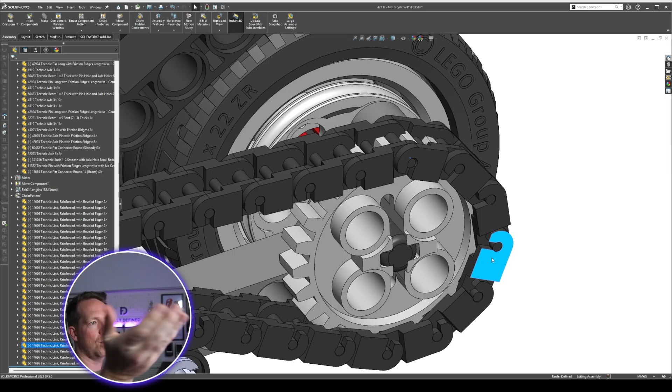Welcome back. Today we're going to assemble the full LEGO Technic motorcycle in SolidWorks, taking every part we've modeled so far and bringing them together in a complete working assembly. If you've ever struggled with assemblies, or you're not quite sure how all the mate types fit together, this is the perfect project to practice on. This video is recorded in real time, so you'll see the actual workflow: how I position parts, how I choose the right mates, how I troubleshoot alignment issues, and how I keep the feature tree clean as the build gets more complex.

I'll show you the exact steps and process I use when building any SolidWorks assembly, from the first mate all the way to the final checks. And if you want to follow along in your own time, you can download the model files for this entire project and build the motorcycle for yourself. It's a great way to practice assemblies, understand Technic geometry, and get comfortable with SolidWorks at your own pace.

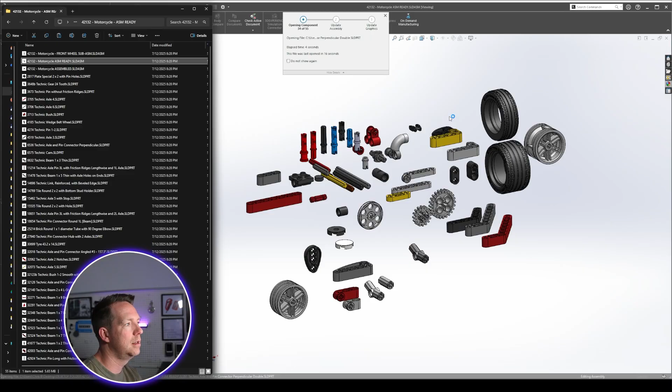So let's start with the assembly ready file. Assembly ready just means when you open up that file, all the parts are there, at least one of every part. There's no mates in this assembly, and there's no other reference geometry. So all I've done is really just drop every part in so that you've got it all here, and you don't need to go looking for things as you get started.

Now, before we start the assembly, there's one other thing that you'll need, and that is the assembly instructions. I've also linked them here in the LEGO library. You can see the motorcycle instructions down the bottom here. Click on that and they'll link you to a PDF file. You can view that in the browser, in Adobe PDF, in Adobe Acrobat PDF Reader—any type of PDF viewer will be fine.

Now, before we actually start mating anything, it's worthwhile taking a minute to think about or plan out your assembly, the same thing you would do with any product design that you're developing. You want to consider who your audience is, who you're communicating to, what you're putting together the model for in the first place. If it's just play or just training practice, maybe it doesn't matter so much.

But I'm always thinking about professional practice. And in this case, if I'm trying to replicate products such as this, and I look at the image, well, there's a few things that come to mind when I can see the product here and I already know the parts that are going into it.

And this is typical of how you might run a product design project anyway. You'll have done your sketches, you'll have worked out what it's going to look like. You start building it in CAD, and then you might build the parts individually or in a master part file, split them out. When you start building the assembly, you're going to have a specific orientation or position relative to the origin where you're going to want to put your parts.

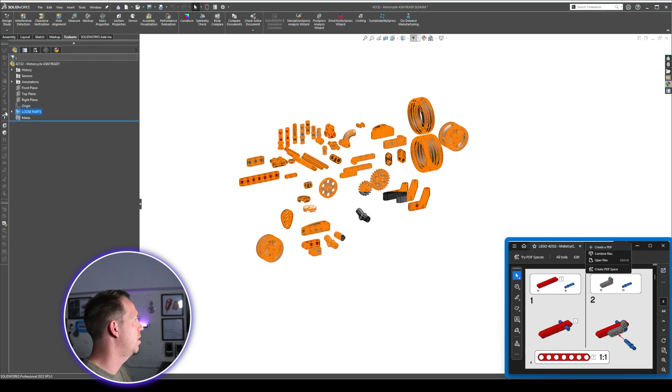All right, first thing I'm going to do—I have put everything in a folder. I'm just going to show the right plane. Let's just make sure planes are visible. Okay, the other thing I want to work out is, where is my front? The last thing I'd want to do is assemble it all facing backwards. This can be important for drawings, rendering, exploded views, or animations that you do later. Just helps to spend that little bit extra time to get the alignment right as you're starting off.

I'm going to show the front plane as well. I'm just going to go to my front view. So I can see this is the front view, and this is the isometric view.

So whatever is my first part, which is this, it's a part with 7 holes and it is red. I think it is this one here. I'm just going to make sure I'm orientating it so it's facing towards the front, and so the mid plane of this is going through the right plane.

First up, I'm just going to use the move component tool, just a free drag. I'm going to rotate this around just to get it roughly in line, and then I'm going to mate it. Sometimes that makes it a little bit easier to get your mates done straight away, because if something is already perpendicular to a plane, SolidWorks might suggest other mates like a perpendicular or parallel mate rather than the one you actually want, which in this case is going to be coincident, depending on how the part is built.

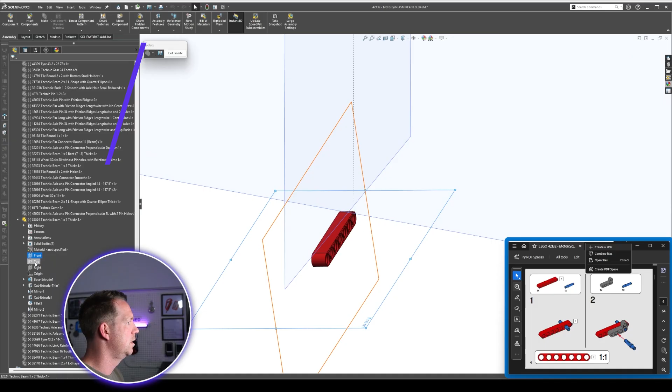I'm going to use a lot of shortcuts throughout this video. The one I just used there is a hotkey—I have the I key on my keyboard set to isolate, so anything I have selected, when I press I, it's going to isolate that. In this case it's isolating a part. I can see this is the part that I want, and I can see it's actually the top plane that goes through the middle of that part.

I'm going to hold Control, select the right plane, and select coincident on the little shortcut bar that pops up, so it's going to line up those two. I'm then going to, as we talked about earlier, hide the front plane, and show the top plane for a second. There's the top plane.

We know that there's going to be a gap here. If we can just use this right plane and this front plane and mate those two, and then for the height, we can either put a fixed constraint on this part—so we could right click it and go fix—or we can put that front plane and the top plane together with a rough dimension in there. Let's say it's going to be 20 millimeters.

Now we'll see this part is fully defined. Everything else is still underdefined. When we're isolating and looking at this part, we get the fully defined information down here. If I isolate, I expect it's very strange—actually it's not, it's telling me fully defined, but I know for a fact that there's a lot of things that can move around. So there we go. Now it's saying underdefined, that's here. Everything else, we're going to start to move around it.

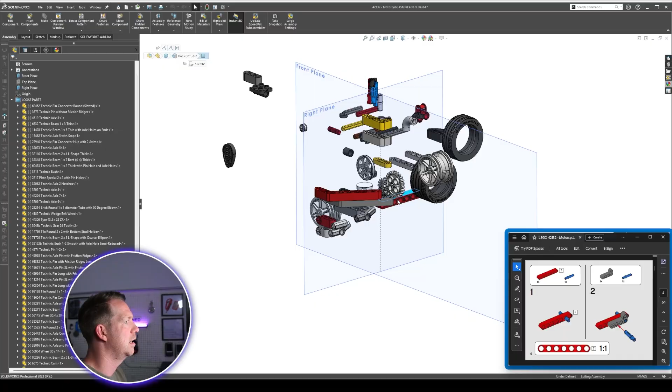So I'm going to start a new folder. What I'm going to do is drag this one out of this folder—to do that, I click and drag, drag it up here, hold the Shift key, and it's going to move it underneath this folder, which means it actually takes it out. I'm going to put this in a new folder called Assembled Parts.

I'm doing this so that we can very quickly hide and show parts that have either been assembled or have not been assembled, just to make things easier for managing later. For instance, I can grab everything in the loose parts options here, so I'm going to grab everything in this folder, click move component, and just drag them off to the side so that they're clear of my assembled area.

Press the tick. The other thing I'm going to do, now that we've started assembling this file, is a save as. Of course, you can save it with the file that you've just done—I'm going to change the name of this one to work in progress, WIP. We know that this one then is our active file, and we've still got the assembled version there for reference if we need it.

All right, first part's done. I'm going to hide the front plane. I will keep the right plane there because we will use that a bit more later as we start doing mirrored components. Okay, next part is a long blue one.

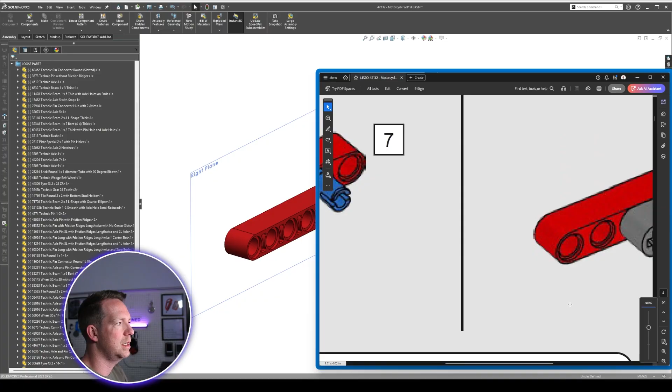Now, I don't know the official names of these parts, but we might learn them as we go. So, some quick mates or some quick points on these—it is difficult to see, but if you zoom in on this detail, you can see it's got a little lip on this side, right?

What that is in reference to is this feature here, which is going to be on this side of the part. So there's a couple of ways you can do your mates. The first one, I was using some shortcuts. Another way is to select two holes like this, or two circular areas, and then click mate.

It's going to bring up the shortcut bar, and it's selected concentric for us. We're going to press OK on that. We're not going to lock rotation because we're going to be very specific and particular about the rotation of our parts, and we're going to make them so that they're all lined up neatly. We want it to look good in the drawings or renders we do later. I'll press OK on that one.

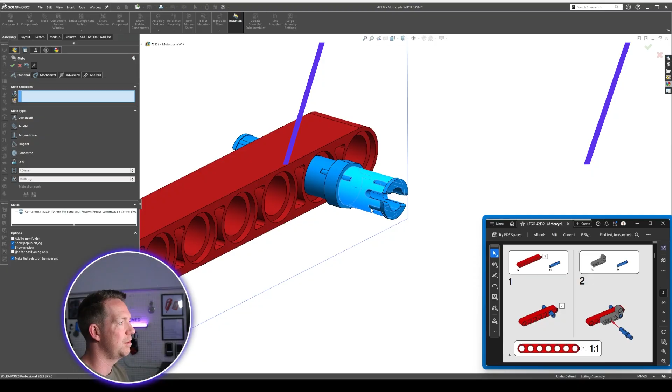Now, to move a part when you're mating it, the trick is to click and hold your mouse button down when you're moving. If you click and let go, it's going to select. But if I click and drag, then I can move or rotate the part around. Sometimes it's easy to do that so you can see these views to then add the next mate.

So we did those two, and that's got the position done now. We need to stop the rotation for this one, so we're just going to select a flat face and another flat face, and SolidWorks is going to make it parallel. You can see on the cursor there's a button with a check mark on the right mouse button, which means if I right mouse button press, it's going to accept that mate. Now I can keep this mate window open—by default it's pinned to stay visible—and just keep adding mates.

If I can find the next part, which is this gray L shape—is it this one here? Three holes and then one across. I'll bring that one down, bring it over here, and click on this face and this face, right click OK.

Accept the mate. Now, if I rotate this down, let's select this face and then the inside face here, press OK—that's adding a coincident mate. You can see over on the left the mates that have been added one by one.

If we need to, for any reason, go back and change those—let's say this one—I can right click and delete, or I can click here and change the type of mate it is. So if I wanted to change it to a distance mate, for instance, this is one that happens regularly, I can just put in the number here and it's going to add the distance mate instead of the coincident mate. We'll change that back to coincident, press the tick, and then press these two surfaces to line them up.

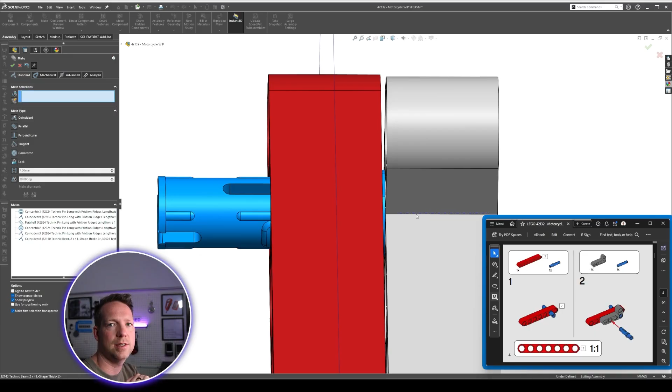If you come upon errors, which we may very well do in this video, you need to work through troubleshooting them. And if you need to change the dimensions of the parts to get them to fit, please be my guest. Let's continue. We're starting slow with these mates, but as we go through some of the basic ones, and you've seen all the basic types, we're going to jump into a bit of time lapse. So bear with me until we get to that point.

Next little trick here, we're doing another one of those blue parts. We've already got one right here. We want to duplicate it.

I'm not sure if I can do this with the mate tool open, but to duplicate, I'm going to press Control on the keyboard, then click and drag. No, that does not work. So I'm going to close the mate tool. Now press Control, click and drag, and you can see it makes a duplicate of the part.

Another way I could do that is to select the part here in the feature tree, press Control C and Control V. If I do that, it's going to drop a part exactly on top of the one that's already there. That one can be a bit more difficult to click and drag. That's why I often don't use Control C, Control V. If I'm duplicating, I'll normally Control, click, and drag to the side.

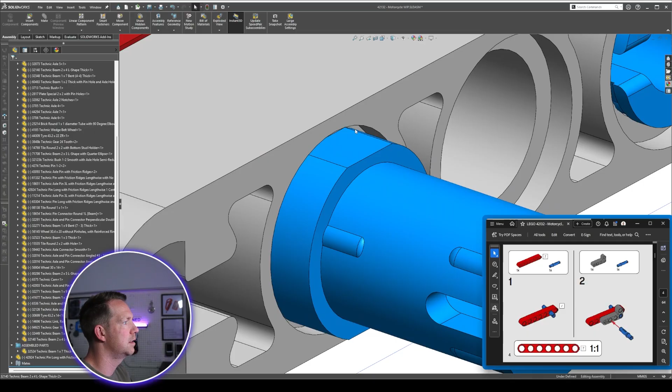All right, so let's grab this one, and I'm going to select these faces, concentric mate, select this face here. Now I lost my mate tool. Select these two faces and coincident, and it's just been added automatically. If I want to keep the mate tool open, I need to actually select the mate tool, and then it'll stay pinned and I can keep going one after the other.

All right, step 1 and 2 done. Let's keep going. Step 3, 2 long red pieces. Let's see if we've got them. There's one and there is the other. I'll bring these across over here.

Now it's showing us how they're assembled. So this one's on this side, this one's on this side. It looks like this and this are lined up. Now you can see in the preview here, it has lined those two up but at the wrong orientation. To flip an orientation, I'm going to click this arrow, flip, make alignment. That's going to rotate around.

So that's good. I want to come onto this side, click this one, drag it out. Just want to get, it should actually be on this side. Yep, so it's this face and this face that are going to be coincident. And then here, if I want to line up this one, get it all lined up neatly, I'm going to select those two faces to make those parallel. And then I'll bring this part over. I'm going to make this and this concentric.

Flip alignment, press the tick, drag it back. I can see that in the picture, the slot is on the side, so I'm just going to rotate it around so it's like this. And then we're going to grab this face and I'm going to guess this face.

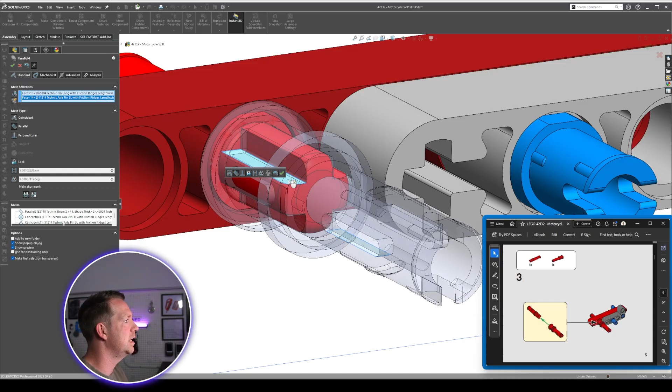This is a parallel mate. It's just lining up those two faces to make sure that they're aligned.

Okay, another step done. Now, at this point, you can see that we're starting to put a few of the parts from our loose parts folder over here. And we have this one as well, so we're just going to drop them into assembled parts.

And what we can do is I can just click on this folder and I can click on this part. I can see where the part is, it's here. I'm just going to drag it to the assembled parts folder.

Or another way you could do that is you can grab everything here, drag a box over it, right click, hide, and then anything in the loose parts folder that is showing, for instance, these three parts, I know that those are these three here. I can click and drag and put them in the assembled parts folder at the bottom. Then I can show this one again so that I know that I'm keeping picking my parts from this area over here.

All right, we have another long part. So I'm going to duplicate that red one. And now actually, before I skip ahead, I've got the model in front of me, and if I have a look on the bottom, I can see that it's actually the gray one that's in the middle, not the red one to the side.

So some of my first guesses, like putting that red one in the middle, were actually wrong. We're going to have to roll that back and change it. It's okay, we're here to make changes and learn as we go. Also, I don't need to add a duplicate of the second red one.

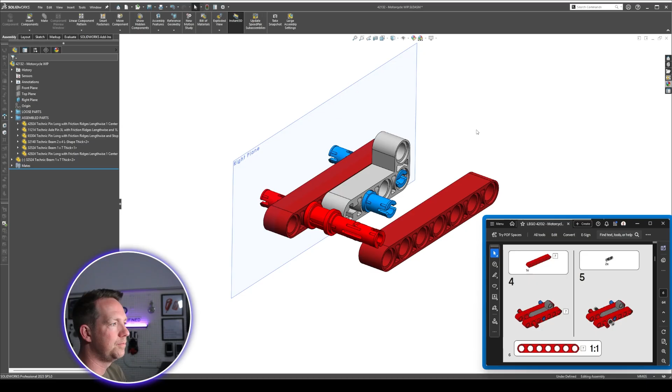This is where I can start to use my mirror components feature. Let me show you how we're going to make the change. First up, I'm going to delete this, then this part here. I click on this Technic beam, and up top I can see these breadcrumbs, which are all the mates that have been added to this part. Here's the very first one we did, which was the right plane.

That's one I can select and press delete on the keyboard, which means I can drag this to the side. Now I click this gray part and see what plane goes through the middle of it - it's the top plane. Hold control on the right plane, add a mate. Now that is the center of my model, not the red one as it was originally.

To mirror or start our mirror feature, I'm going to go to the Assembly tab, Linear Component Pattern, and under that drop down select Mirror Components. I'll select Mirror Plane - that's going to be our right plane. For components to mirror, the only one I can see mirrored so far is this red part.

I don't need to go through all the subsequent options - we're not changing any orientation, just making a copy on the other side. I'll press OK, and that's going to mirror that part for us. We can see it here in the mirror component feature, and if we press the drop down, we can see we have one part there.

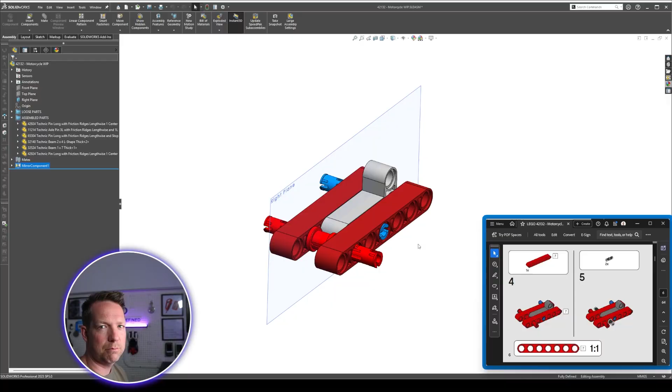Now, I'm not sure if you saw it earlier when I showed the preview of the finished assembly, but there is only one mirror component feature in the whole assembly, excluding the sub-assembly of the front wheels. The process I used throughout this Lego build is that every time I came across an instruction step that made a mirrored component, I would just add that part to the existing mirror component feature. There are some parts or types of geometry that don't like to be mirrored, and they want to change orientation or not make a proper right or left-hand version of themselves like we'd expect.

There are some more advanced options to go through in that mirror component feature that we'll look at if that comes up, but otherwise it's a very simple way of doubling up your assembly if the whole thing is symmetric, saving you a lot of time. We'll use that regularly as we go through, particularly through the time lapse as well.

Make sure to save regularly, Control S, and let's get on to the next step, which is adding these little black parts in. I've got one of them over here - I'm going to bring that down. We're going to use a few of these, so I'll actually leave the original one here, make a copy, and use the copy to mate. Let me grab this one, get these two faces, mate those, drag it out, and select these faces for coincident.

Remember, if I want to keep the mate tool open, I need to click the mate tool. Let's click these two to make this part aligned.

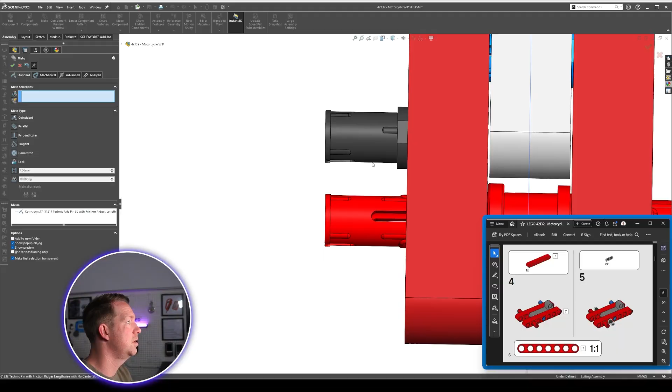Now I've just noticed something here - I'm not sure if it's going to be an issue or not. I'm going to hit M for measure, that's another hotkey. From this face to this face, you can see the dimension is 8 millimeters. From this face to this face, we can see it's 7.9. So somewhere along the way, these parts have been created separately - one measured differently than the other. One of them might have some interference in the model later. It's not a big deal for us in this project, but that's one of the things you can check in assemblies as you go through, part of the validation process you go through as you're creating your product.

Now, as we just did previously, we're going to add this part to our mirror feature. So I'm going to edit feature on the mirror component.

I'm going to select the new part, press right mouse button for OK. Now we can see it's been mirrored across.

Very quick process. All right, let's fly through this next step very quickly, because I want to get up to our first key lesson of this assembly, which is going to be using the cam mates. That is coming up in a couple of steps.

So this one here, I'm going to do concentric. Now I want to keep adding mates because I want to get on a bit of a roll. Let's see if we can't do that. Put that one there, again, edit the mirror.

And here we have what looks like a new sub-assembly. Actually, it kind of is. We can see in this image here, we're making this sort of group of components that we're then going to mate to the existing geometry, the existing parts that we've already put together. It's not necessary to make this as its own sub-assembly file.

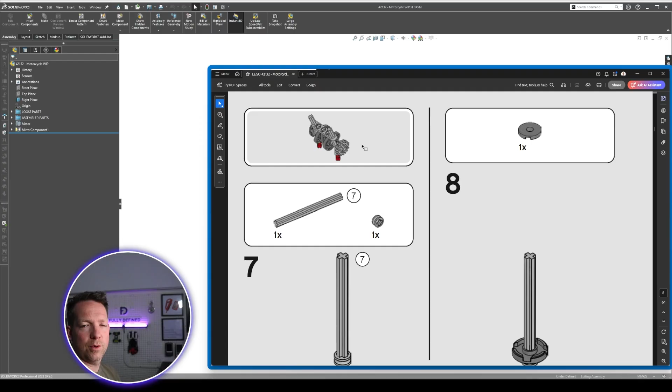You could do it if you want to practice sub-assemblies. I'm not going to do that today, but feel free to diverge from my instructions and use the LEGO instructions that are there. What I'm doing is simply a demonstration of some of the tools that you can use.

All right, so I'm going to grab that axle, which is 7 long. That one's over here, I believe. Axle 7, yep. Bring that over and grab one of these parts, I think - a Technic bush. Bring that over as well.

Now, you've got to remember that the drawings for LEGO are done for building the physical parts. Doesn't mean we need to assemble in this exact same orientation. So even though that one's going straight up, I can actually leave it going crossways, and I'll do that.

But what I will do is just temporarily right click on this one and go fix, so this part won't move and I can mate the other parts to it.

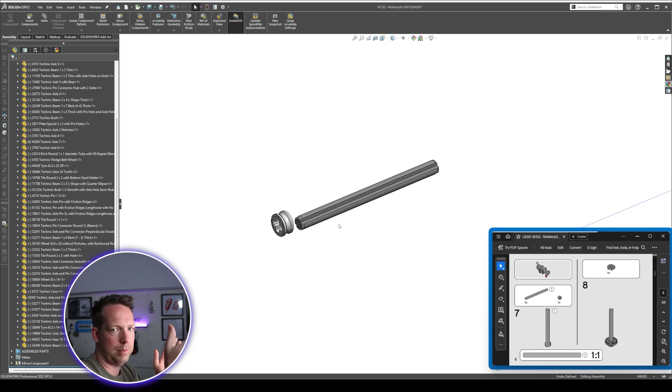Now, one thing you could do here is actually bring all the parts together that you need, bring them over so they're right in the space that you're working with, and then open the mate tool and just go bang, bang, bang, one after the other without having to go and grab each part each time. This is a more complicated assembly with a lot of parts, but if I was doing my own project with only like 7 or 8 parts, I would just have them all together in one, so it's very quick to get everything done that I need.

So if I just go through the next couple of pages, I can see that there's a few other parts here that I'm going to use. So I'm just going to bring them over so I get all of them - this one, another cam, another little nut, and then the gear, which looks to be the small one here, and then this 4-piece fin part.

All right, so that's the next couple of steps. So I've got them all close by. Now I can go through and add those mates very quickly. So let's go mate - we might very quickly here, we'll jump into time lapse.

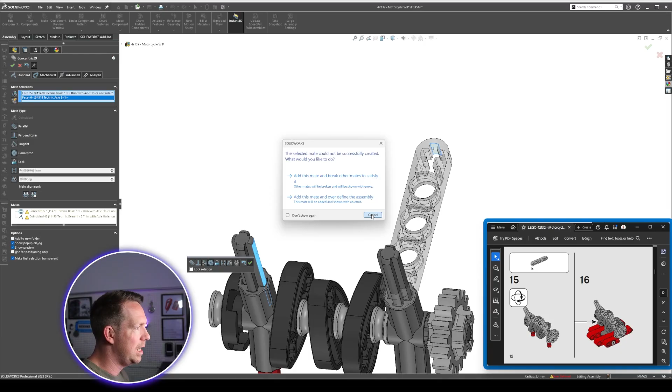What we're going to do is press cancel - that's going to delete that mate we tried to add - and press OK. I'm just going to rotate this one around and we can just see roughly how far apart it is. Now, we know that our hole center to center in LEGO is basically 8 millimeters.

If there's 4 holes, there's 32 millimeters. If I measure this one to this one, center to center, you can see it's 31.65. So somewhere in those mates, all the mates that have happened below it, there needs to be a little bit of extra gap. We can see there's a bit of extra gap here that really hasn't been taken into account yet.

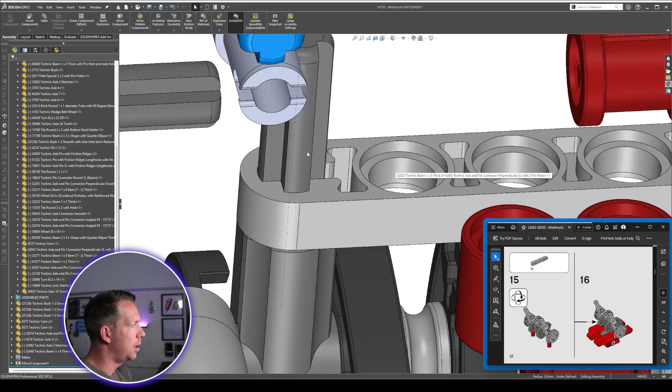So how are we going to fix it? There's a few ways. First, I'm going to look at this part here, see its mate, the coincident one, and delete it. That's going to let this part slide up and down. I still need to add some mates back, but I'm not going to let that one control the distance. Instead, I'll grab the mate tool, grab this outer circle, semicircle, and then this face, and now that concentric mate can occur. I press the tick, press OK. Now that part's fully mated. This one can't move, it can rotate around, but its position is set.

If I want to get the rest of them perfect, I could have a look at what this distance is. I can see it is 0.35. I could go through the rest of these and offset each of them 0.05 of a millimeter. Maybe it's down here, maybe it's somewhere along the lines, maybe it's just this mate. Maybe this one and this one here - press isolate - these two should be perfectly centered, shouldn't they? So maybe that's the mate we should add to work out the rightful position, the correct position.

For now, let's just leave it. It's 0.3 of a millimeter. It's tiny, but if you wanted to later, you could go back and edit those other mates so that they're all perfectly evenly spaced. We're going to move on. Feel free to do that if you feel like it.

So now back to our main assembly, our setup. Let's just get back to the key orientation, which is isometric, here. So this is the view, and now we're ready to assemble this part.

Now I've had to come back to this one and find the one that was originally fixed, and it was this one going through the middle. So I'm going to right click and press float, then bring this to the side, and it's the red part that's going to fit into these holes here. So I'm going to grab the mate tool, grab these rounded edges on the axles, grab a rounded face here, mate and flip alignment. Yep, that's okay. And then I'm going to do the same on this one over here.

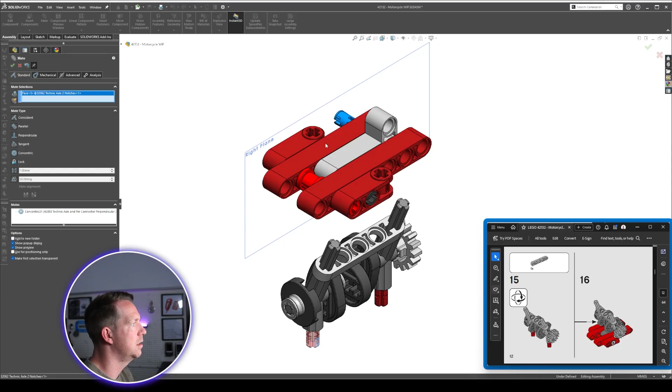So again, we're doing a similar thing with our mates. We might find that it doesn't fit, but I think because we've already done that spacing here to get it perfectly right, and I probably already troubleshooted the rest to get them perfectly right, that one worked. Okay, let's add another mate here, bring that component up, and I think all those components there are now fully defined, apart from this part that we can rotate. Cool, this is some really good progress.

I'm just going to clean up my folders, grab all these parts, move them into the assembled parts folder. Anything else, loose parts? Well, my trick was, remember, hide everything, see what's left in the folder that's visible, click and drag those. You can see there's quite a few parts now, and I'm going to move them all to my assembled parts folder. Cool. So, let's keep going.

So here we're going to learn about cam mates. First up though, we have to get these cams - sorry, I'm not an automotive guy - we're going to get these parts into the assembly. I do know that they do not fit perfectly, but it should be enough for us. You'll see what I mean in a second.

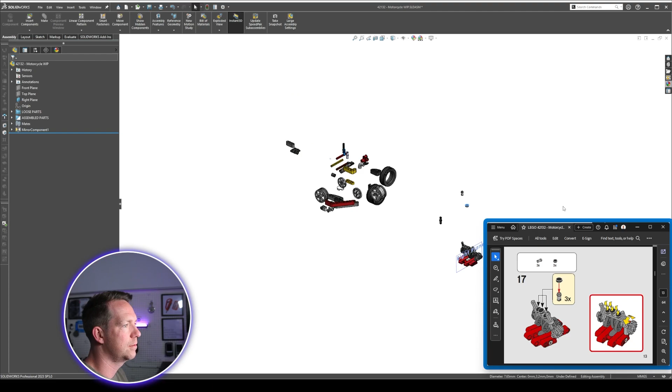So I'm going to grab this down here, and we need to do 3 of these, but we're not going to do a linear pattern because, as you can kind of see from the preview image, they're actually going to be moving heights at different points relative to the parts that are beneath them. And that is a fun little thing to have a go at.

All right, so we've got one there. I'm going to bring that one over here, do a concentric mate, and we're going to get these to line up. Okay, and I'm just going to leave it here, and I'm going to do the other ones. Again, make sure you're saving regularly.

I'm just going to hold Control, click and drag, and then open my mate tool and repeat those similar mates we just did. All right, so we've got those three lined up, and we can see there's a little bit of clearance between them.

Now, how this part functions in the real model right here is that when these parts are rotated with the gears, with the chain, these will ride up and down. They'll pump up and down following this outer face. In SolidWorks, that is called a cam mate. It's not one I've done a lot of before, but it's a fairly simple mate to do.

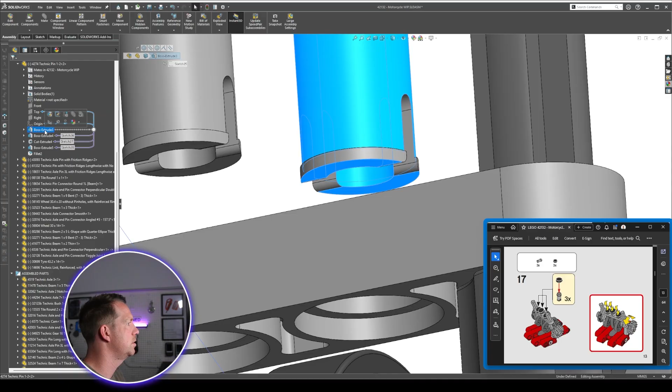The one thing that will speed you up here is that instead of selecting this face, I think we get a better result if we use a sketch element that's right in the middle of that part or feature, that geometry. So I'm going to click on this sketch here, and go show sketch. And you can see what that does in SolidWorks. I can see the sketch that's creating that feature all the way back through here into my assembly.

Now, if you have pressed show sketch and you still can't see anything, just check your hide all types icon. If you are hiding all types, that will hide planes, sketches, other reference geometry, even if it is showing in the part. Sometimes you need to uncheck that or make sure sketches here are visible so that you can see the sketch in your assembly.

All right, so I can see that sketch. And what's important there is I'm going to use this little point, the center point of that circle.

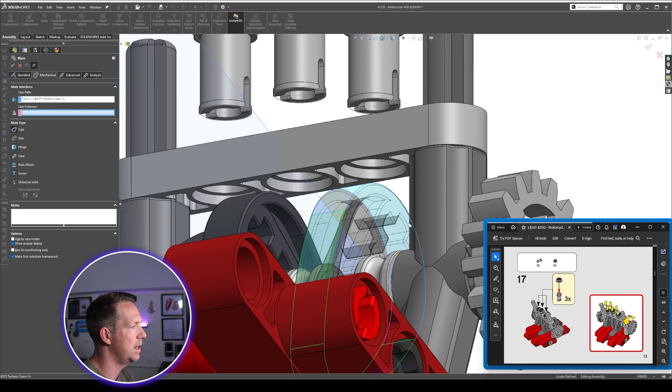I'm going to open my mate tool, click on mechanical mates, click on cam, and I need to select a cam path and a cam follower. The cam path is this face. You can see when I select the face, SolidWorks knows tangency along that direction, and it can work out where that cam path is going to be. So I selected the blue, it's added in these other green faces. Cam follower is going to be this sketch point here, and that's it.

I'm going to press right mouse button OK, and I'm going to go through and do the other ones at the same time. So cam, select this face, select this point, and then the last one over here, cam, sorry, I've got to select the mate type first, and point, and OK, and OK.

Now, this is not perfect. You can actually see a bit of an error here, a bit of interference. In fact, on both of those. But I'm just going to rotate this around, and we'll have a look at what's going on.

All right, so we're just going to change something here. I'm going to use these two and isolate. The problem we could see is that by using that center point as the cam follower, often the parts are intersecting, interfering. It's not a true representation of what's happening.

So what I'm going to do is select this part and select that cam mate and delete it. I'm going to add a new cam mate, but this time select the face rather than the point that's right in the middle. Now what that means is it's going to be the tangency of the face, the entire face, not just a point. But you can see it's already moved to a position of clearance.

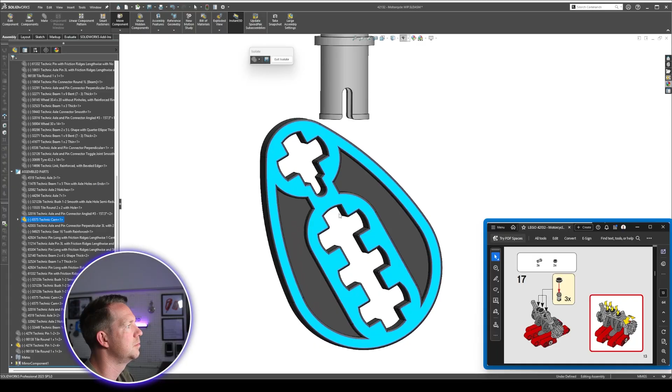When I rotate this part now, it's going to move up in a much more realistic fashion to the outside. Yeah, there's still a bit of jumping, as you can see here, but it is much closer without the interference when you're comparing that to what we saw before.

So I'm going to do the same to this one in the middle as well. Now, you don't actually have to delete the mate. You can just change the cam follower from a point to an outside edge sketch. That is another option, or the face.

Let me try that one, the point on the outside edge. I think I'm still going to get the same issue. Yeah, so I'm getting this interference. So I'll change that again back to the face.

Okay, might get a warning. I'm getting an error now, but we'll see if we can remove that. Doesn't like this one, I will delete it. I'm going to try again. Now, this time it hasn't given me an error, even though I've done exactly the same selections. Exit isolate.

We can see a preview now of how that looks. Now, it's not perfect, but it's probably an improvement.

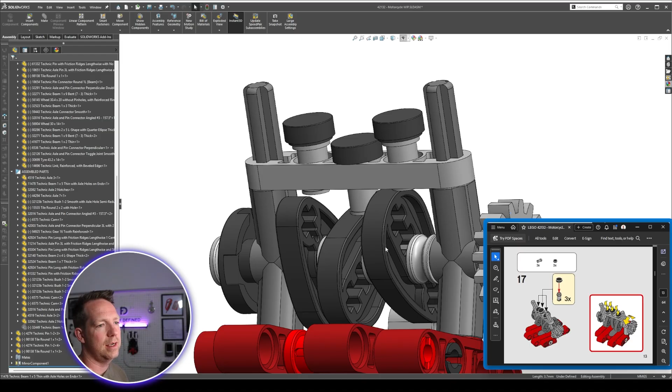Now, the thing that I would like to see, and which is difficult in this assembly, is there should actually be a combination mate. I want to do a distance mate or a range distance mate. What that means is an advanced mate where I have a range of distance.

So I could set it to be between 0 and 5 millimeters, for instance, because what I don't want to happen is these parts, the heads here, dipping below. You see here, because it's following this tangency at the bottom, it's coming all the way down.

Whereas in the real part, what's happening is this part then just floats and stays on top. So this one would never come lower than this. This part would continue to rotate, and then this part would come back up again. You don't get them dipping down in interference like you can see in this example.

But that doesn't exist yet in SolidWorks, so we cannot add it at this point. Save that, and let's continue.

The next series of mates are things that we've already come across - a lot of coincident, concentric, some parallel mates to get things lined up. Let's time lapse through those, and I'll come back when we've got something important to look at.

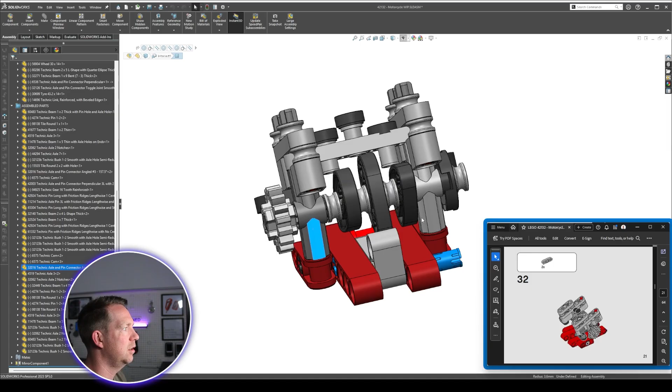The same thing can happen down here. I can see these 2 earlier. I think this assembly has both dark gray and light gray versions of those parts. I'm going to grab this one here and change it to gray, and grab the one that I did not do a mirror for, so I'm going to have to grab this one as well, and just change the color of both of those early on. Right now, just keep going, and now I can continue from here.

All right, the mate I'm about to use here is called a width mate. What the width mate does is let me set the position of this part to match the width with another part. Basically, get it in the center, but you're doing it without selecting 2 center planes. You're doing it by selecting 4 faces on the outside, or 2 faces and a plane.

In this example, I'm going to select 2 faces of 2 different parts, and it's going to align them so that the width on the outside is equal. This is under advanced mates, and you can see a width mate here.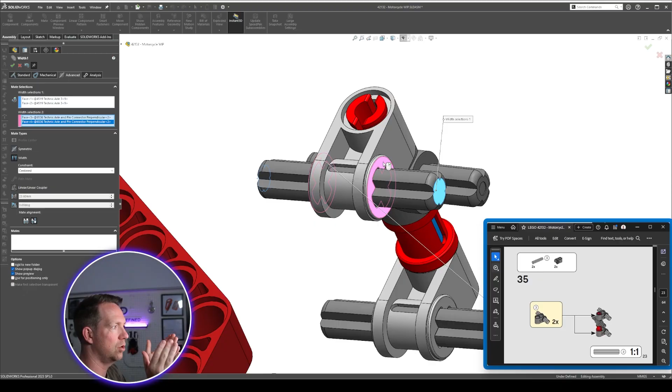Our width selection, I'm going to select this face and this face, so 2 outside faces. And then for the inside, I'm going to select this face and this face. You can see SolidWorks just then moved the parts to make sure it's equal. We're going to right click, and we'll press OK.

And now just to verify that for you, let's select my M key for measure. From here to here is 7.8 millimeters, and from here to here is 7.8 millimeters. The one at the bottom is now also aligned because I mated these two faces together. And that is a width mate.

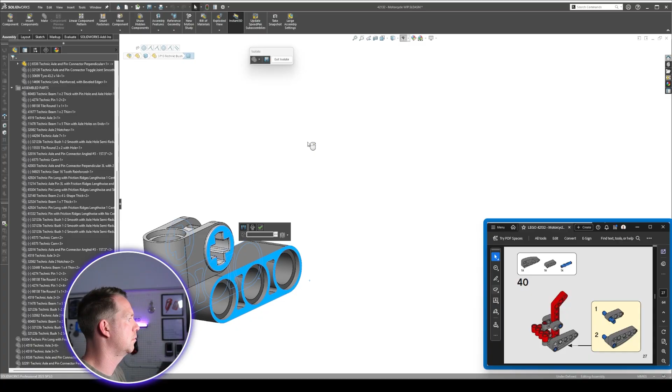All right, so we're at the point here of this little small assembly step where it's asking us to flip it upside down. So I'm just going to go to this series of parts here, just find the one that was fixed. I think it was this one right here.

So I'm going to float that one. Now the whole thing can move. Now we just have to be a bit careful with that. Sometimes I can rotate some things inside out that aren't fully defined yet.

I'm going to grab the move component tool, the rotate component, and just click and drag and try to reposition it based on roughly what we can see in the drawing, just getting it somewhat close. And the next step is to line up, I believe, these holes here.

So I'm going to grab that one, and I'm going to grab, looks like it goes through this, so that's a concentric mate. This one then comes into the center. So this part, I'm going to find this one, I'm going to get the plane that's going right through the middle of that, which is the top plane, and I'm going to mate that with the right plane of our assembly.

Okay, just moves it across ever so slightly. I'm going to rotate the whole thing up. I'm going to grab this part here and put that through the hole as it shows, and get it all lined up with these faces on the inside. Now that one should also be right in the middle.

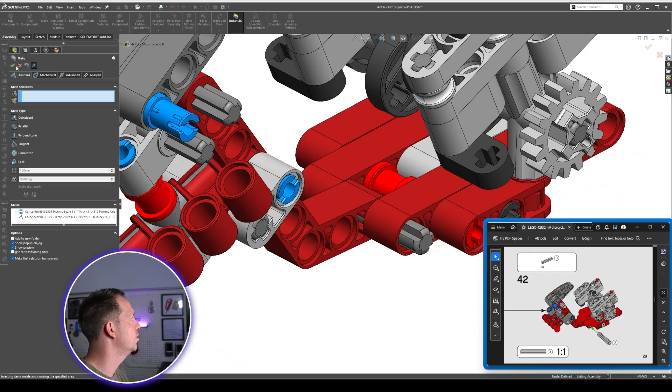We can see something just jumped there. I guess this part's kind of flipped around. This one, Technic Axle 3, if the right plane there is in the middle, which it is, I can also grab that one and the right plane and make that coincident to get that axle right in the middle. Press the tick, and just before we go too much further, let's just clean up my assembly again.

So I'm going to hide all those parts. We can see we're starting to get through them now. Grab all of these, bring them into the assembled parts folder, and grab these ones. Make sure I'm saving regularly as well. So I want to get those. I'm holding control, and that enables me to select multiple files at once, multiple parts. Drag those down, show those, and show those.

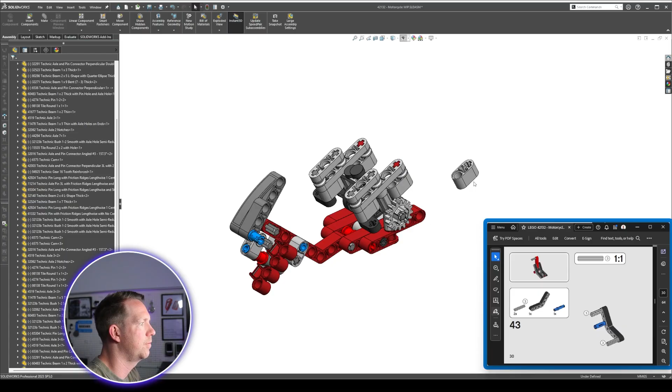So this one here is not in the assembled parts folder. Back there. Okay, looking pretty good. I had two of these. Don't know if I need it. Nope, delete that one. And we don't yet have the other parts to join this all together, so I'll just leave it at this state. Keep going with the assembly.

All right, now here's a point where if some of your dimensions are off in the parts that you're creating and you try and do these mates, you might find issues. So we're about to mirror some component. I'm just going to mirror, I think, this one to the other side. And then we're going to flip.

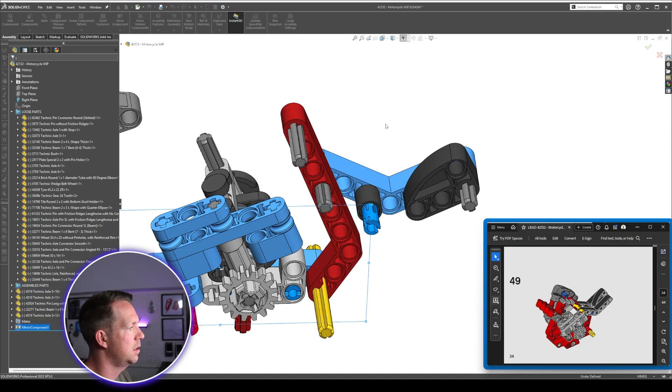Actually, we're going to move this one downwards, and this one is going to move across a bit over this direction to a position where I believe this and this can meet. All right, so what we're going to do is try to get this hole and this hole concentric. Voila. And then we're going to grab this one.

I'm just going to delete this mate, which made it coincident on the interface there, because this one's going to get pushed through like so, so that it's level with the other three. So I can grab this and make them coincident. All right, the body of the motorcycle is starting to come together.

There is still some movement, which is here. In reality, this part can move up and down the seat of the motorcycle. You can see this one at the rear. When it drops down, it sits on this small round element here. So this one and this one, we can actually make tangent, right? And that will fully define its location.

Now, you may have noticed here, we can see something's going on with the thickness of the parts, and that's partly to do with how these were mated. They're all mated coincident, there's no gaps between them. So we need to introduce a gap so that this one has some room to move. Most of these parts are 7.8 millimeters, meaning if this is, let's say, coincident with this one here, we should actually have like a 0.1 millimeter gap. That's just going to spread things out ever so slightly.

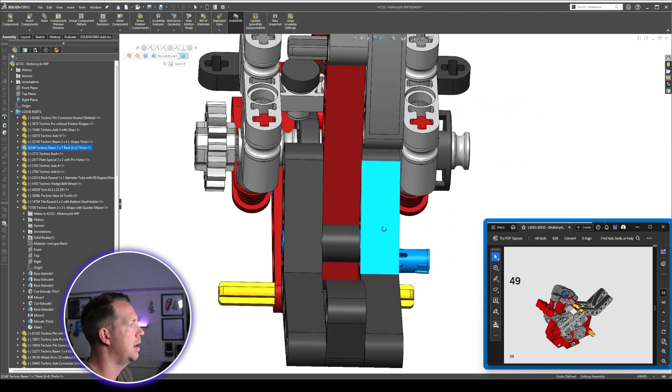All right, we can see this one then should also actually be in the middle of the assembly. So the top plane and the right plane should be aligned, but they are 0.1 millimeter apart at the moment, so again there's another mate here that we need to move. And I'm just going to have a look at this one. Probably not that edge, maybe this edge here, coincident. I'm going to say that one is also going to need a distance 0.1 millimeter just to spread things out.

Okay, now this one at the back is looking good. This one in the middle, still not so much. I think the reason for that is that this part is actually measured 7.85. Should have some clearance, but I think the way it's fitting onto this blue one, if we have a look at, make these transparent for a second, we can see the depth of those features.

I think it's probably not quite right on one of those mates. So either this part is too wide or the depth into this part is too shallow. By that, I mean this feature here between this face and this face.

I've got it at 0.8. I actually believe it might be 0.9. So I'm just going to edit this one, come right into the feature. I can find the depth here, make that 0.9, accept change, exit isolate.

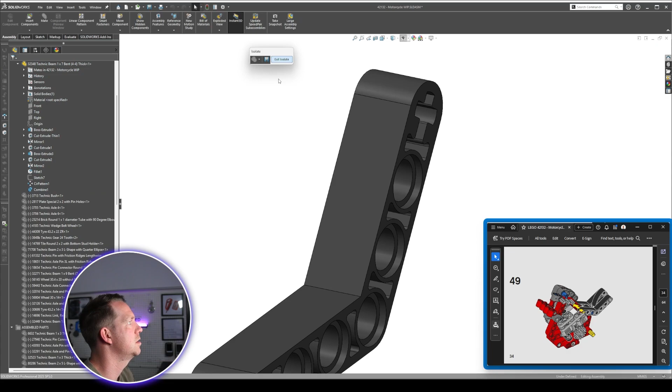If we have another look now, assembly and at those parts, we can see now this one has a tiny bit of clearance on each side. It's not perfect, but that's good enough to continue on with. Let's continue, about halfway through the assembly now, or a little bit over even.

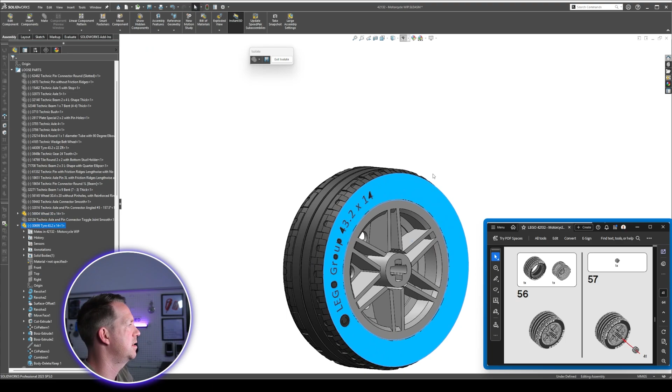A small trick here to get rotating parts to align. So in this case, like the wheel and the tire, I want them to both rotate at the same time. Just find a plane that's common between them. In this case, the front plane.

No, sorry, top plane from the wheel and front plane from the tire. And mate those two, and you just want to get them coincident or parallel. Either one's fine. Then when that wheel rotates, like you rotate the outside of the wheel, the inside part rotates as well.

We're up to the chain in the instructions. I'm going to leave that to last. Complicated, and I just want to get everything else sorted before we go through that one. All right, so we'll come back to it.

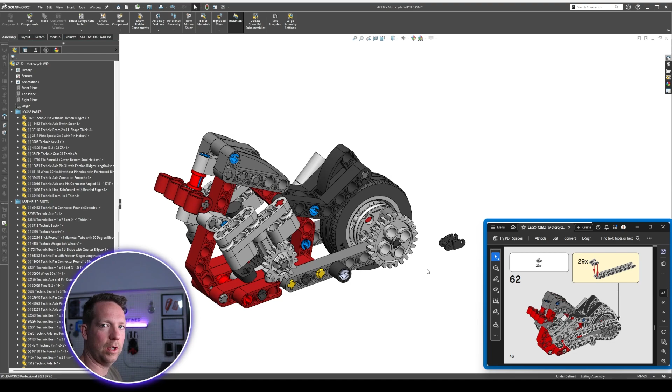All right, we are nearing the end. The next steps you can see are all about the front handlebars and the front wheel. Now we're going to build those as a separate sub-assembly within this main assembly. The reason for that, we're not going to use the mirror component feature because the whole wheels will rotate.

Okay, so let's say the spokes that come down, the handlebars either side, if they're mirrored, they're mirrored when they're flat, but as soon as you want to rotate those and turn them, if you mirror them on the right plane, they're going to distort and break. It's not going to work.

So we have to put that as its own sub-assembly. In the sub-assembly, we can mirror it. That's going to save us some time. But in this main assembly here, we can't do that. So the process to do this will be a little bit different.

We're going to try and do it in this main assembly here, convert to a sub-assembly, then mirror the components. Let's go through that process. First, we'll get all the parts together for that sub-assembly.

We can see we've got, actually, I've just identified an error. I've put the wrong wheels in the back. Let me fix that up real quick.

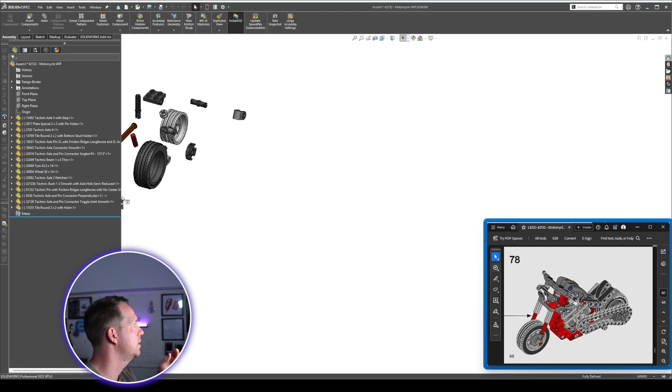I'm going to save this, and what I'm going to do is open the assembly. Right, I can see all the parts here, but now I'm in just a fresh assembly file. I'm going to go File, Save As, and I'm going to give it a name.

Now we already have one in our folder that we've extracted. I'm just going to save over the top of that one. I don't need it as reference anymore.

Now this gives it a proper name. It gives it its own file that you can open separately to the main assembly. And if I Control Tab back to the main assembly, you can see it's been renamed here.

All right, now we're going to create the sub-assembly mates in its own file, not in this one. In this one, what we'll do at the end is have the finished handlebars wheel, and we'll just do the connection where these connect or plug into the main handlebars, along this feature here. But that's going to come in after we've done all the other parts, all the other steps.

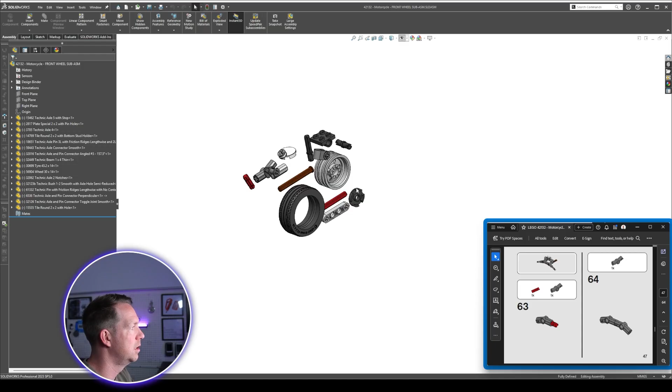So let's control tab back to this, and now we'll roll back to the very first feature for this, the handlebar section. Remember, we're going to try and do this so that we only have to create one side.

So first, I'm just going to roughly rotate this one into position so that we get a good starting point. We'll go like this. And I'm just going to fix this one, and we'll come back, float it, and do the other mates to it a bit later.

Now we've got all the components here, so I'm just going to open the mate tool and try to do as many mates as I can without closing the tool. I've already stuffed up one of the mates, so I'm going to float it. Let's see where the right plane for this part is. The right plane of this part is right in the middle, so I'm going to grab that, grab the right plane of the assembly, and make them coincident.

Now I'm going to start my mirror feature. I'm going to mirror this component to the other side. Now I can see there's something wrong with my mates here. This tangent one, I need to remove. Instead, I just need to separate these two. I think there's a reason why I don't want to mate this just yet, so I'm going to leave it floating and keep going with the next features.

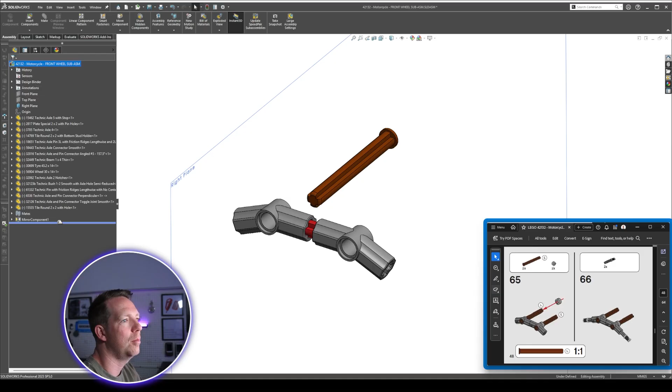Now, when you are adding mates and building something up like this, it can sometimes be easier, before I add the next step, to grab the rollback bar and jump above the mirror component so that I'm building on one side of that feature. I can always roll back down and add components to it later without issue. What can happen if you leave it down is sometimes you might add your new parts in, but they're mated to the ones that are mirrored. That can cause trouble, depending on exactly what you're doing. But doing it this way, all on one side, makes things a little bit simpler.

That one rotates, that's fine.

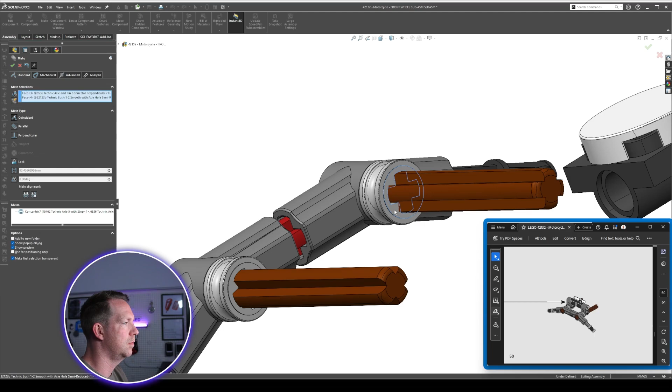I have got to fix this first mate though. Bring that up, make it on this face here. Exit isolate, bring that down, float. I'm getting into a bit of trouble now because a few things can still move, but I think we're getting close to resolving that, so I'm still not going to change anything just yet. We'll keep going with adding features to my mirror component.

Parts, adding parts to my mirror component. Now here it lines it up, but I'm not going to do that yet. Okay, I can see that it's where it's assembling, so I'm going to leave that. It's this next part that I'm going to put in that's going to work out that spacing for me.

So I'm going to grab that one and that one, so they're lined up. That's done the space. You can see this now has a neat little gap. This one, I can't quite move on yet. If I just fix this one temporarily, I can bring this up, float this, and then leave it where it is. Okay, that's all moving as one. That's fine for now. I'm going to keep going with the next steps.

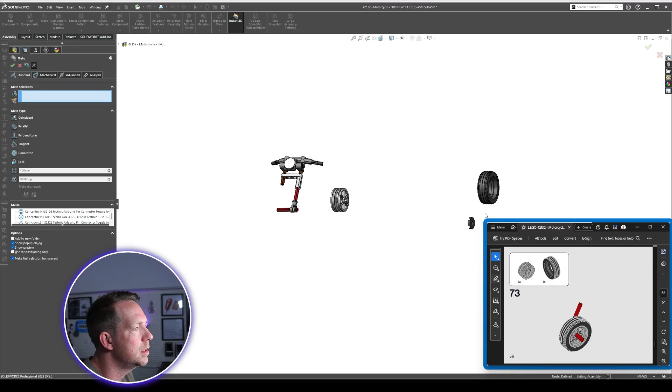Okay, I'm doing it a little backwards, but I think it'll still be okay. Grab another one of those. So this one looks like this. On this side, it has this disc over here. Move that over, it sits on that face.

Yep, and that one can rotate freely. Then inside that is the wheel, and that looks like it's in the other direction. Is that one going to be up against this face? Yes. Now does this one push through? Yes, it does. Okay, I can see one of my mistakes here.

So this one is not mated to that face. This needs to pull back, as does this one here. Not everything will be mirrored on this, just some components.

Does that fit entirely inside that? It does, looks like it does. Yep, so that one sits on that face. That looks a lot better now. Okay, I think we'll get the tire on.

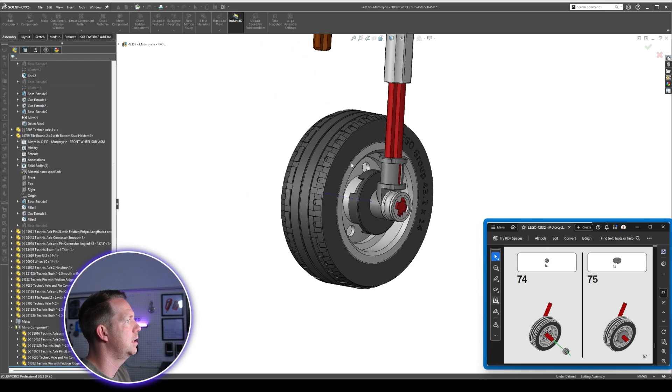That was a pretty easy mate, that one. We'll get those two parts aligned. That was top and front, top and top.

Okay, and now for the last step, I believe, we're just going to update the mirror components to add in the other parts we need. So we're going to want one of these, one of these, one of these, one of these. Right click, OK. We can see something is not properly aligned, and that's because our wheels are currently twisted.

This one can rotate at the moment when it shouldn't be able to. We're going to fix that, and that's because these two parts aren't mated properly. So I grab this face and this face. They're now fully defined. This one we can float. And if we look at the finished picture, I think we're pretty good now.

So what's missing is the red part that fits in between these two. Now we can define that, or allow space for it. I think that's the easiest way to do it. So if we come to this part, we can measure this one and see that this is 7.8 millimeters.

So here in the sub-assembly, I can do a distance mate and make that 7.8 millimeters. That's going to fully define the distance between them. And then you can see the whole assembly is really almost as one.

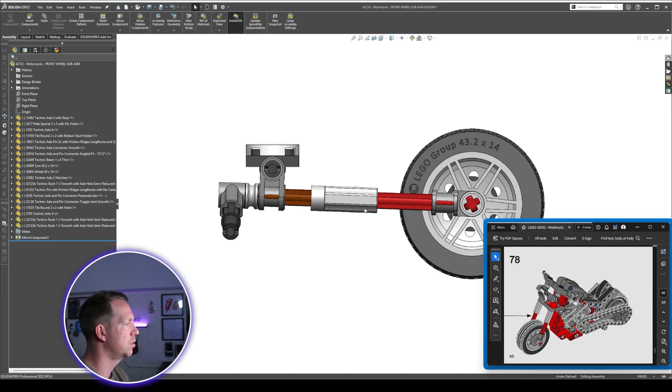So what else do we need to do to fully define this one? Well, we really just need to lock in a position. It's not too crucial, but we do want to redo maybe the alignment to get it facing the same way. At the moment we did it as per the instructions, but let's try and flip that around. So if I try and rotate this component, you see I can get it to here.

It's kind of backwards. If we go to that very original part, which is here, and we flip this mate, it's going to swap it around so that now when we're on the isometric view, like we are right now, it's facing the same way as it will be in our main assembly.

Let's do a couple more things. We're going to grab, just want to get it to go straight up for one. So I'm going to grab this face and the front plane. Actually, I'm going to grab that whole part, the front plane's going through the middle of it. I'm going to grab the front plane of the assembly and make those two mate.

What we're trying to do here is get this sub-assembly fully defined. And then we're going to use the wheel, so the wheel is the biggest part, the tire on the outside. Going to grab that and the top plane, so you should bring that right up. Top plane, face on the tire, mate.

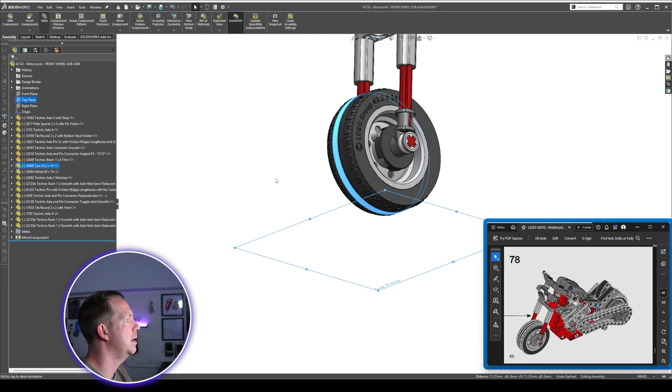I'm going to make that tangent. And now we can see it's nearly fully defined. There's a few parts that aren't - we have this one here, we're going to tilt that downwards, we're going to give that an angle. So I'm going to do a quick angle mate and make that 30.

And what else to fully define? We've got the tire, the tire can rotate. That's okay, but if we want to have it perfect, let's get it so it's on this angle.

So I'm going to grab the front plane and top plane there, and make them parallel. Then in our feature tree, all the way down, there's a bush that can rotate. If I isolate these two parts, I can see that this and this are not aligned properly, so I'll just quickly align those.

And then the last one is this tile. Let me grab the right plane, front plane of the assembly, and mate those. Now we have a fully defined sub-assembly. As you can see down here, fully defined, no minus signs in the feature tree. That one is all good.

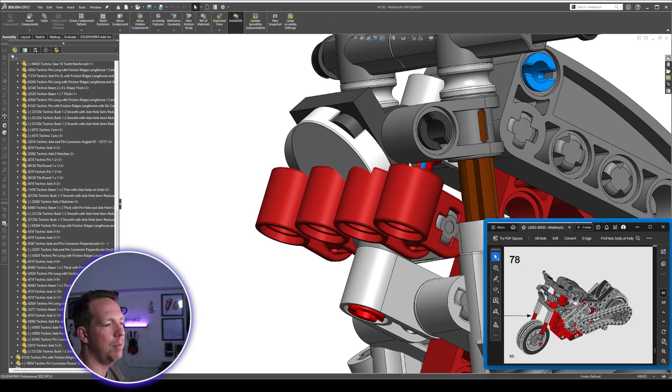So I save that, Control Tab, going to come back into the main assembly. I can see my sub-assemblies here. Just going to drop it out of that folder and move it out so we can see in some space. All we need to do is add some mates to join those two together.

So grab our mate tool, going to grab this face and this face, get them concentric, and I do the same on the other side. Now this will work if we have the spacing correct. We've had those issues earlier, remember, where the spacing is not quite right. We can see we've got a similar issue here, so it doesn't want to do the concentric mate.

Now we have an option when this kind of thing comes up. We can break other mates to satisfy it, or we can over-define the assembly. Let's over-define the assembly, it's going to highlight the errors for us. And those are errors that we can see in the mates folder here. It's really just the last one we've added, that these two cannot work at the same time.

The reason is, and we should know this, the distance between those two is 24 millimeters. The distance between these two is 23.8. And that's all to do with the mate that we put in here, where this one is coincident on that face. But what it needs is a 0.1 millimeter offset distance mate.

Now let me just see if that went through. So I isolate that. No, it did not work. Let me try that again. I'm just going to quickly delete the concentric mate giving us the error. Come back to, going to hide the sub-assembly. So sometimes I find it, you hide and show parts while you're working on your errors.

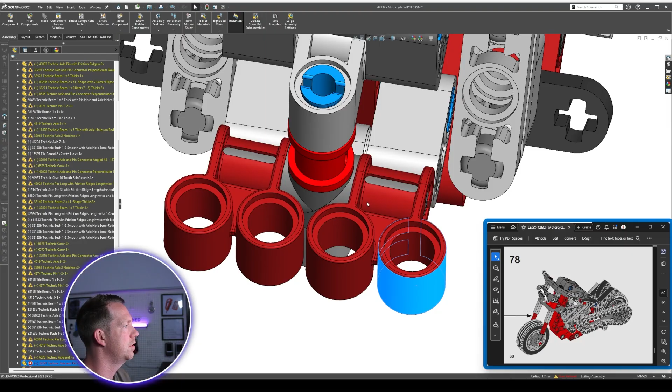Okay, so what's going on here? The distance mate doesn't want to calculate for some reason. Let's delete also this concentric mate. Still does not want to calculate. Maybe I selected the wrong faces. Just going to delete that one.

Okay, so I can see this one can move. And I can see that this one's not mated in the assembly, which again is correct because we want it to be able to rotate. So I do wonder if these two needed to be in the sub-assembly as well. It's okay for now, I'm going to continue as is.

What needs to happen is that both this side and the other side need that distance mate that is 0.1. You'll see I've got no issues adding it this time. On this side, I'm going to edit this mate, put that one in, 0.1. You see it moves out, no problem. The distance between these two holes is now 24 millimeters.

So if I show my sub-assembly, I'm going to add those mates back in. So here and here, concentric, and here concentric. Still doesn't want to do it. It's quite odd, but we'll work through it.

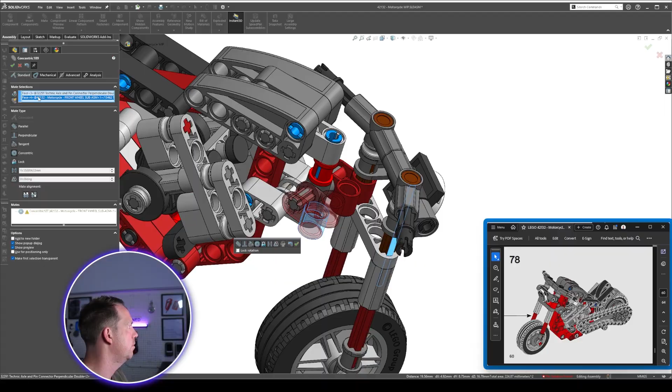Why don't we try it in a different way? We're going to mate these ones. No, didn't want to isolate it properly. I'm going to select these to isolate, because the other thing we're going to do is a coincident mate to get the spacing right. So I'll just get that one in place. Let's try and rotate these two and see how close they are. We should be able to get them concentric, but we're still having issues doing that.

All right, this is all part of the troubleshooting. Now let's have a look at what's going on, have a look at the top view. I just isolate those parts again. I think it's the fact that the way they rotate is not quite right. Like right now, it appears that the mates are working, center to center is 24, center to center is 24, but it's still not calculating fully.

All right, so another approach that we can take here is I can remove these parts from the main assembly and put them into the sub-assembly. That is something that you can do simply by dragging.

It's quite odd, but if we think about what side's been mirrored in this assembly or in the original sub-assembly, we can see all these are the mirrored components, or everything on that side. So let's not take this one. I'm just going to delete it, and take this one here, and drag it up the feature tree, straight into the sub-assembly.

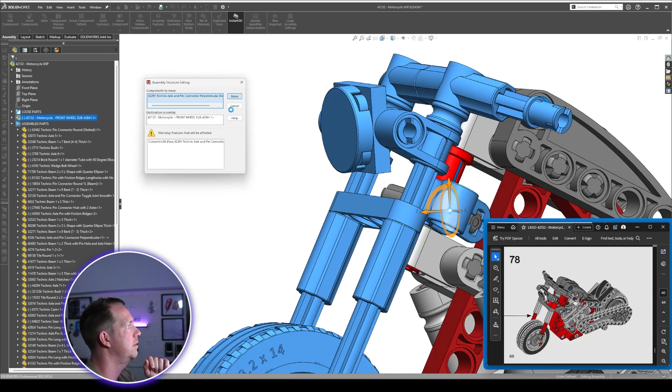Now it says assembly structure editing. It's going to move it, and there's a feature or a mate that's going to be affected. That's okay. Now if I open this sub-assembly, I can see this is back in, and now I can add some mates to it, the mates I was having trouble with before. I can line it up.

We did have that distance mate. We can delete that now because what we can do is add a coincident mate directly to this. Okay, that part is now fully defined. I can also then update my mirror feature to include that part.

Come back into our main assembly, and now we can try a different way of mating. So before we had a distance mate and a coincident mate, if we can now add a concentric mate here, now I believe we've solved the issues.

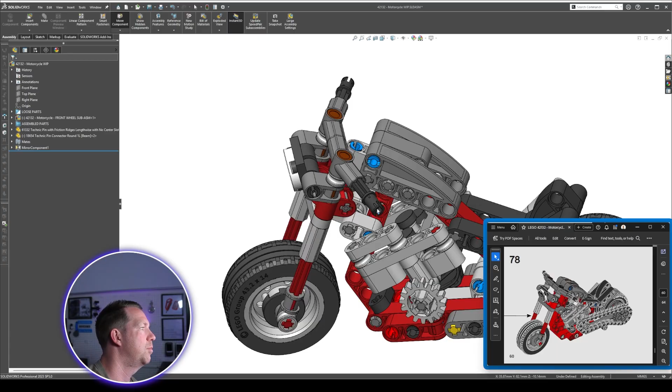We have a rotating sub-assembly on the front, okay, and very clean mates and build to get to this point. Obviously a bit of messing around as we're putting it together, but that's what the assemblies can be like. So that's our sub-assembly, and that is one of our very last steps.

Now, just to get it fully defined for the time being, I'm going to grab the right plane of that sub-assembly and the right plane of the main assembly. I'm going to put a little angle mate in, 160, just to put those handlebars on a bit of an angle for us, give us a neat little view. Okay, now that's fully defined. So that's actually the last step.

So this part here, we didn't need. Are there any other parts here in the loose parts that we haven't used? I think they've all been moved across. So I'm going to drop them all down to the assembled parts folder. Same with this and this, which means the only loose part we have left is the Technic link as part of the chain.

And that is going to be the last feature that we add to this assembly, but it is quite a challenging one. All right, so let's have a look at this chain feature.

Now I'll just show you the detail that we can see here in the instructions. So there are 29 of these pieces, and the way they orientate is that they hook over each other from the top. So if we have a look here, we can see it, each one snaps down onto the one in front of it, and it creates a chain around these two gears.

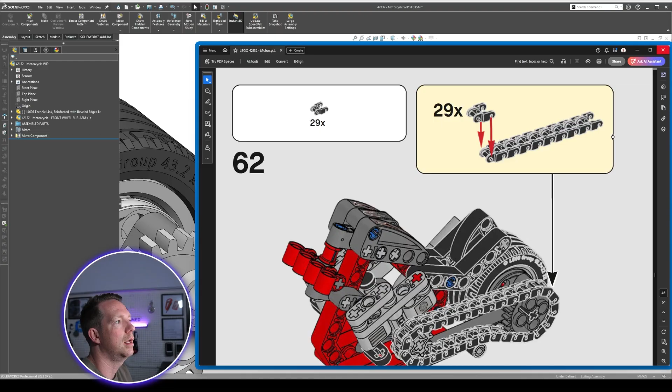With that being said, I'm going to close the instructions because we're done with those now, and we're going to focus on putting this detail together. So disclaimer on this element, I'm not an expert on chains and belt mates in SolidWorks, far from it. But as you can see from the example I showed earlier, it can be done. And I'm going to try and take you through it in as smooth a way as possible.

So first up, we need to create an assembly feature, a belt and chain. Now we need to select the cylindrical face or axis of the pulleys, gears, wheels around which the belt will pass. While we're creating a belt, the belt is going to help give us a path for the chain to follow. And the path is not just these two gears, but it also includes this little black element at the bottom. So it's going around the gears and then up over this little bush.

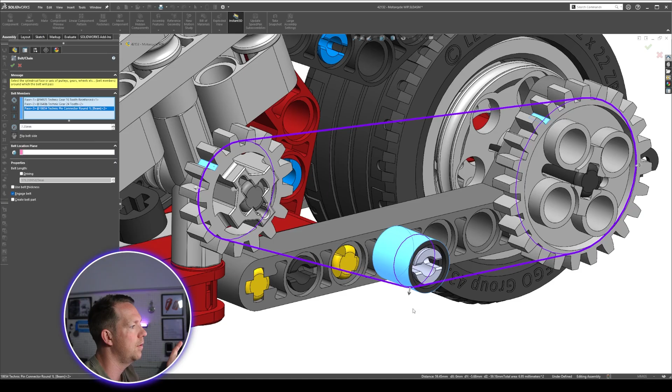And to do that, we need to select the members that are part of that, the belt members. We have one gear here, but you can select any of the round faces that are part of that gear or the axis. We have one gear at the back, and then we have this bush in the middle. The chain, the purple preview since my colors are set to purple, will show you where that chain is going. Clicking the arrow will flip the direction. Now this one in the middle that's going over this bush comes up on the inside.

Now we can set a belt location plane. For that, I can use one of the parts. So I'm going to try and find one of those gears if I can.

See, okay, gear here. I'm going to use the front plane of that gear for my plane. Now I'm not going to create a belt part, I'm going to engage the belt.

I have that ticked, at least in the one I did successfully. The other option here, if you already know your belt length, you can set a dimension and make it driving, and it's just going to work out how big it needs to be around each of those.

I'm not going to have that. What I do need, or have determined from testing, is that the size of these diameters around each of the belt members, the diameters of the pulley, the combination of those and where it's going, and the combination of the features of your chain component, how far between point A and point B, there's a direct correlation there to get it to work perfectly.

So far I've been unable to do that, partially because I don't want to spend days and days trying to work it out. I just want to get close enough to show you how to do it. And then if you want to become an expert at belts and chains, you can do so.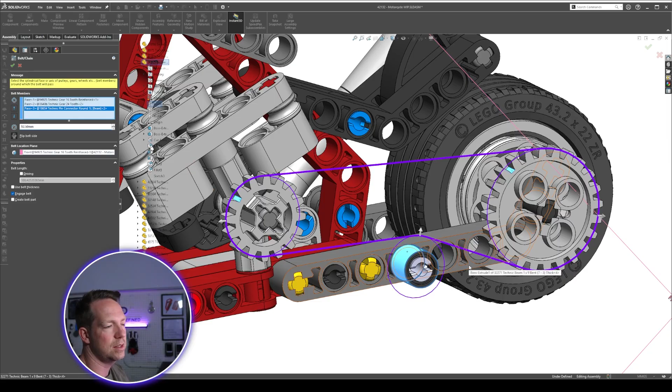On the second gear, it's going to be 24.52, again bigger. And then the last one I'm coming to 12.5. Now this will make more sense once we go to the next step with the chain components.

I'm going to press OK. Now that's giving me an error - one of the pulleys is already fixed. Very good. I'm going to unfix whichever pulley that is.

Might be this one. Well, there's two mates there - belt mate. I'm just going to suppress that feature and that mate, and work out what's going on, why it says it's fixed.

They can both turn. They can turn this one. This one can turn as well, but not that it has to. Or maybe that's an issue to do with where I said it was driving.

Now I'm going to grab this mates folder here. You can see all of these different mates. I'm just going to clean things up - a few mates that we no longer have need for, and a lot of mates that are very standard. You can put mates in a folder just like you can put components in a folder, and features and sketches in a part. All right, let's try and unsuppress that belt feature.

Okay, so I'm not getting an error now, which is good. And you can see with that belt feature in place, when I turn one, it's turning the other. This is really neat - one of the neater parts, I think, of this mate in SolidWorks, or this assembly feature in SolidWorks.

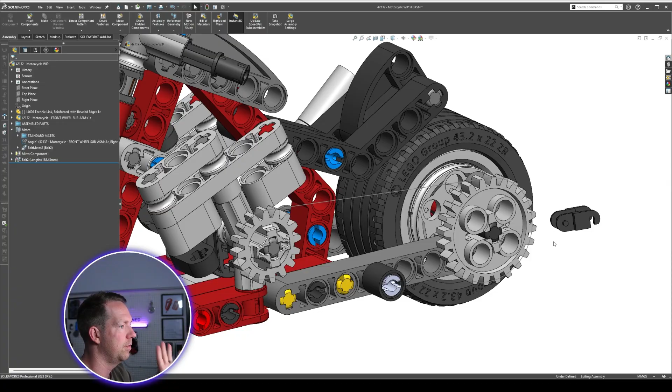Now, so that's part one - that is creating the chain, belt and chain feature. The next part is to get this component in the right place. And let's see if I can remember how I did it last time.

We're going to do a chain component pattern, so linear component pattern, we go to chain components. There are different parts, different ways you can have the pitch. We're going to use the third option, which is connected linkage.

Our chain path, we're going to select as this sketch - or in fact, let me just use the dropdown here as this sketch, so sketch 4 is our chain path. Our chain group is going to be this part, and what we're going to do is select the path link.

So the first path link is this element, the second is this opening. And it's obviously very important how accurate the part is that you've measured and recreated for this to work.

I think from the other demonstrations that I've found online - a couple of the YouTube channels, tens of thousands of views showing how a chain works - they've been able to do this step accurately, but no one's been able to make them and get them to move using just move components correctly. Often the movement is happening in a movement study - a little bit different, not a big deal.

But the way to actually calculate the chain length, the belt length, is to do with the number of links you have and the space between them. There is some maths there that you can work out to get it done. If I get time in future, I might put something together on that, but that's not the focus of this demonstration today.

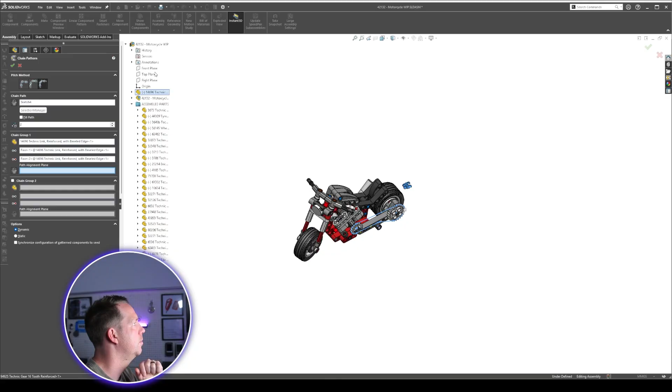The path alignment plane - we're going to use the same plane that we used from the gear. I just want to find that gear again. It's here, and it was the front plane. It's not going to let us use it. Nope, not going to let us use it. So we use the right plane as the path alignment plane. We might have to come back to that.

We're going to go fill path - actually, we're not going to fill path. We're going to press 29, and I might need to come back and work out where that plane should be for this to work. Selections for the pattern are incomplete - it won't let me select that front plane. So the path alignment plane, which I was getting wrong, is actually from the chain part itself. I'm just going to bring that back across, and we'll repeat that process.

I'm going to go to chain component pattern. We're going to select a connected linkage. The chain path - we're going to select the sketch from the belt, so it's sketch 4. We're going to fill the path with 29 instances. Our chain group is this part, and we're going to use this face and this face as our connectors. Our alignment plane is the right plane of the linkage. Then we can see our preview - looking back, it's looking all right.

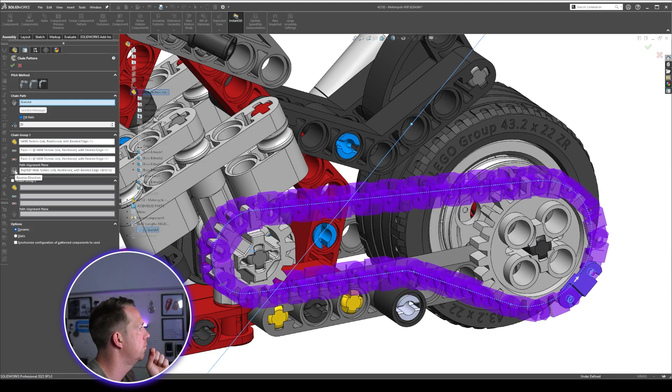Let's press the tick, and there you can see our chain now does look like it is upside down. I wonder if there's a way to flip that. I think we can by flipping this. Press OK. Now it appears to be going backwards compared to the instructions, but I don't think that makes a difference. Let's see how it moves.

That is our chain, and so what it's doing is following the sketch path - you can see the two points, so focus on these two points here, like the center point of these. It's following the path all the way around, and those dimensions that we input, it's very sensitive.

Now there is one thing I can point out in this - if you look at this join here, it is not perfect all the way around. That's where I said I've been unable to perfect this feature to get this to perfectly match. I think there's an issue somewhere with the dimensions, the inputs, but as much as I've tried, spending a little bit of time on it, I haven't been able to get that one join to be perfect. But other than that, you can see we've made quite a nice feature there.

Now, if we did need to reverse the direction, I believe what we'd have to do would be grab this one here and potentially flip it around. Don't know if we could even do that now - no, probably somewhere in the chain pattern. Perhaps we need to reorientate it before we do the mate, but I'm not going to waste too much of your time trying to get that exactly perfect today.

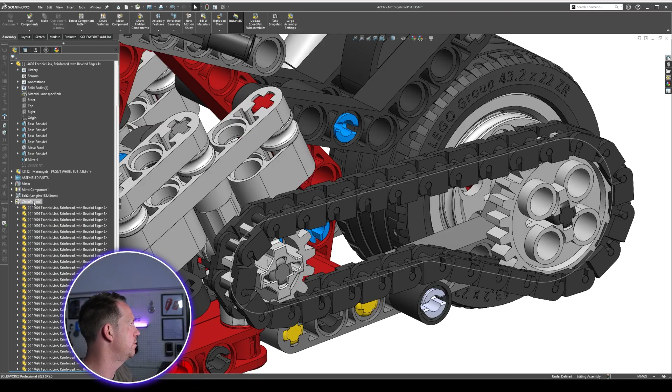The one thing I did mention, though, while we can get this mated and we can get this mated, getting them both connected - I don't think it's possible with a complicated chain like this in SolidWorks. I'm yet to find a tutorial or demonstration online that shows how to do that. I have found some that claim to do it, but if you watch them, particularly slow them down, you'll see that they work for a little bit and then they stop working. What those tutors have done is a gear mate, mechanical mate gear.

They've selected a part like this, and let's say a tooth like this, pressed OK, and then they'll be able to get them both to move. But as soon as this component moves away from the gear, you'll see as it snaps around here, the rotation changes significantly, as you can see on this point - it's barely even moving. So it's not an accurate representation of what happens with a physical part.

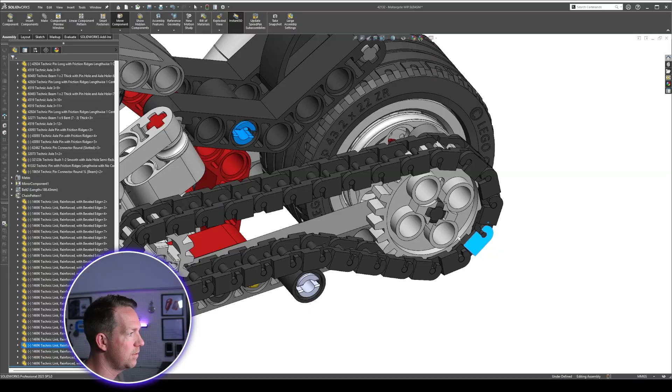So I don't have the answer for this. If you do have the answer, please drop it in the comments, let me know. All right, so that is our finished assembly - well done, you made it.

Now, we didn't get to look at display states, but that is the one last thing I would like to show you before we wrap this up. Display states - let's just check I've got all the assembled parts showing. Yes.

Display states are under the configuration manager, just at the bottom here. I'm just going to bring that all the way up so you can see. This is the default display state.

When I was developing the first version of this assembly, putting everything together, to make it easier to see the internals and visualize, I created a second display state. Display states let you quickly move between having things transparent, hidden, or different types of views without needing to manually click on a bunch of individual parts.

You can name display states, so this might be called chain mech. You can delete them, you can duplicate them.

They're very handy. In this chain mech display state, what I'm going to do is hide this and grab everything that's here and hide that too. I don't need it. I'm going to grab these and hide those. I'm interested in seeing these internal components here, not all of this, so I'm going to grab a lot of those and hide this.

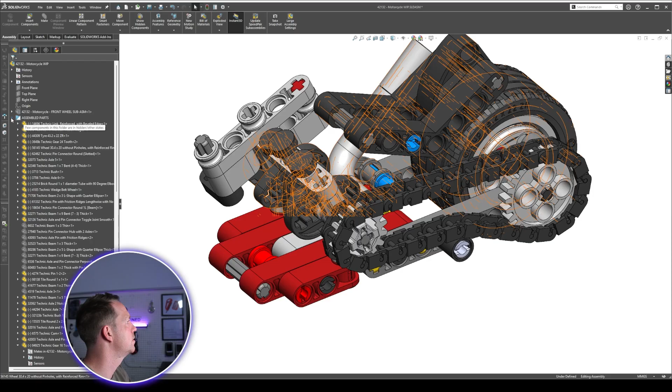For my chain mesh I want to see, for instance, which link this one is. I want to make this one a special color so it stands out in the assembly, so I know which one's the very first one if I need to make changes. I'm just going to make that purple. So this can be the display state called chain mesh.

If I wanted to show a colleague, client, or manager my work quickly, I don't want to fumble around hiding 10 or 20 different parts before being able to display this type of model. If I have that display state and want to keep going with my work, I just double click on the original and it brings everything back the way it was.

I can keep going with my work, do other views, etc. When I want to show those details, I go to display states, double click on chain mesh, and it hides those components for me and also changes the color of the parts. Display states can be used for colors, transparency, and line types.

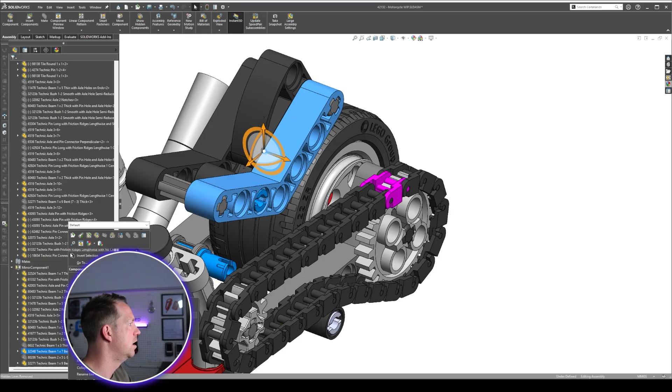One thing you could do is click on a part here. I can click on, in this display state, the component display. I might want this part to be hidden lines removed, okay? I might want a lot of parts to be hidden lines removed. I can do that here, and have different parts with different view types for different display states, for different purposes.

Communication, drawings, displays, animations, whatever it might be - there are a lot of options you can work through with display states. I think I'll do another video on that another day with a bit more detail. Gonna wrap it up here.